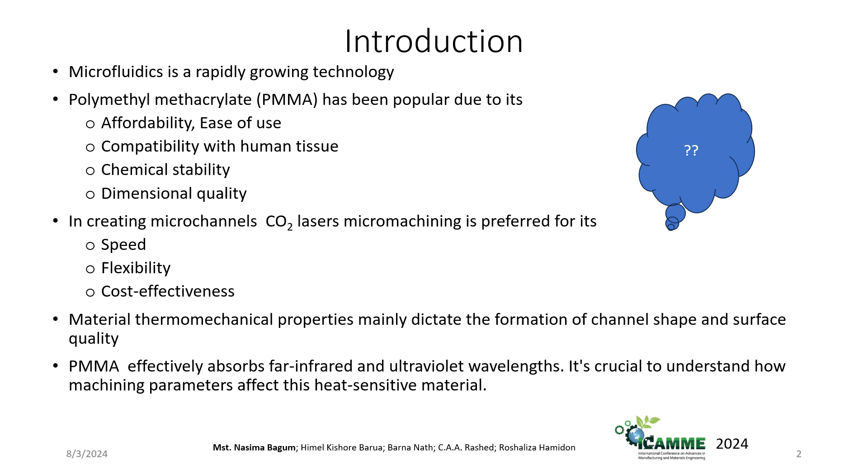In creating microchannels, previously photolithography, chemical etching, and in some cases ultra-short pulse lasers were used. However, carbon dioxide laser micromachining is preferred for its speed, flexibility, and cost effectiveness. In laser machining, material thermomechanical properties mainly dictate the formation of channel shape and surface quality. PMMA is a good absorbent of far infrared and ultraviolet wavelengths, so it is crucial to understand how machining parameters affect this heat-sensitive material.

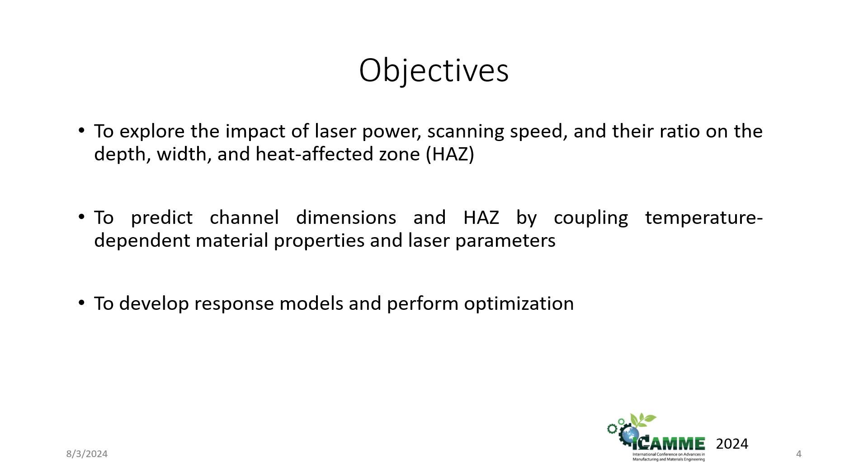Previous researchers worked on micromachining of PMMA focusing on different dimensions. The novelty of our work is we use finite element analysis and temperature-related material properties to estimate the channel width, depth, and heat affected zone. The objectives of our research are to explore the impact of laser power, scanning speed, and their ratio on the width, depth, and heat affected zone, to predict channel dimensions and heat affected zone by coupling temperature dependent material properties and laser parameters, to develop response models and perform optimization.

The methodology is shown in this slide, where a carbon dioxide CNC laser is used to create microchannels on a PMMA workpiece, with power varied from 20 to 80 watt, and scanning speed from 200 to 500 millimeter per second. According to Design Expert software, we get 11 experimental runs. Each PMMA workpiece, having dimensions of 40 by 20 by 3, was machined using a single pass. The responses, channel depth, width, and heat affected zone, were measured using an optical microscope, and the temperature generated on the work surface was estimated using COMSOL Multiphysics software.

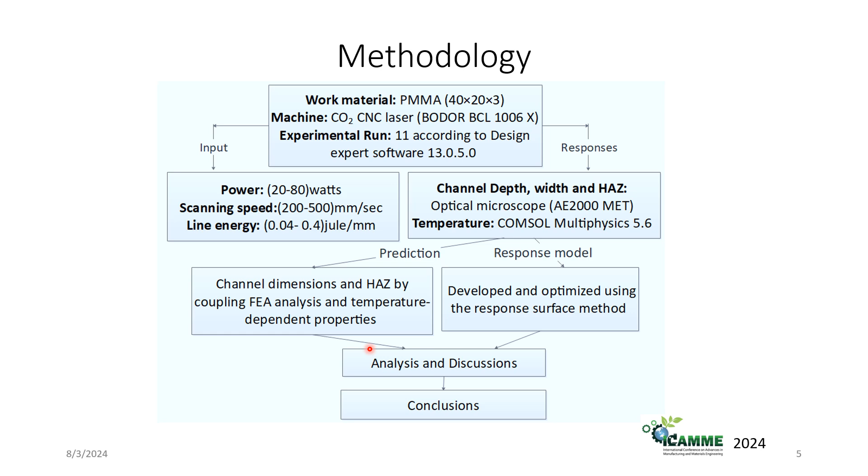Channel dimension and heat affected zone were predicted by coupling finite element analysis and temperature dependent properties. The response model was developed and optimized using the response surface method. Then the results were analyzed, discussed, and some conclusions were drawn. The laser machining schematic diagram is shown in figure 1, where laser from the source is directed to 3 mirrors and focused on the work surface.

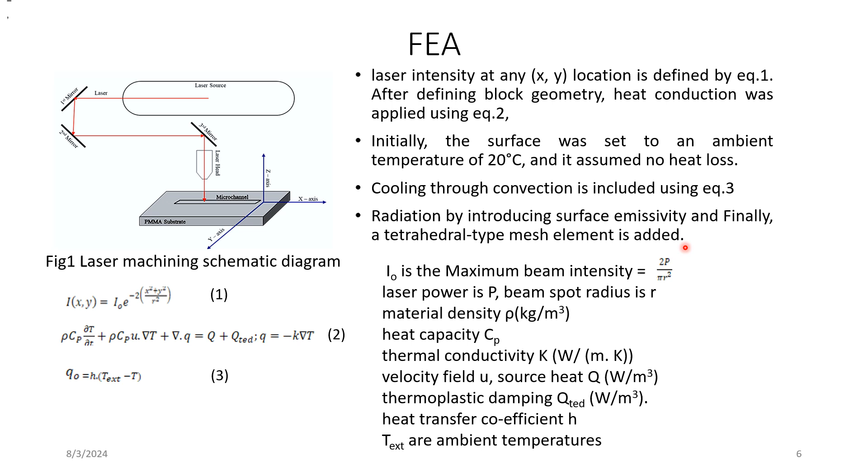In FEA, the laser intensity at any location is defined using equation 1. After defining the block geometry, heat conduction was applied using equation 2. Initially, the surface was set to an ambient temperature of 20 degrees Celsius, and it is assumed that there is no heat loss. Cooling through convection and radiation was also introduced, and finally a tetrahedral mesh element is added and the simulation was run. Here are the results.

During laser heating, temperature is adequate to vaporize PMMA. Since the laser is a moving source, this temperature gradually decreases, leading to material removal up to the sublimation point of 300 degrees Celsius. Beyond this point, the grain structure changes, resulting in the formation of the heat affected zone. In figure 2, this is the temperature profile towards the depth. When the material cools until it reaches 300 degrees Celsius, we get the channel depth, which was calculated by the cut point of the temperature profile and 300 degrees Celsius.

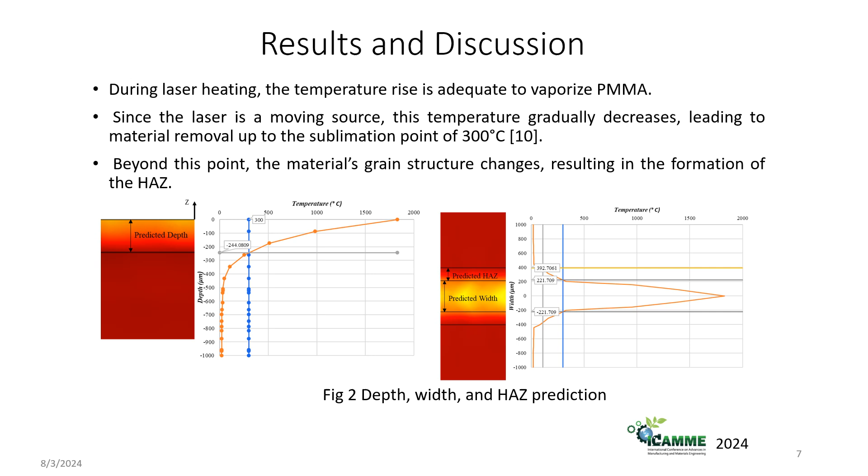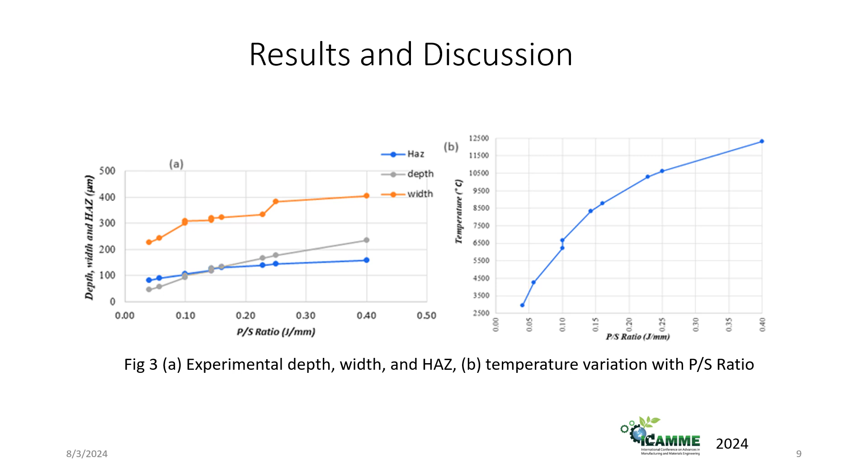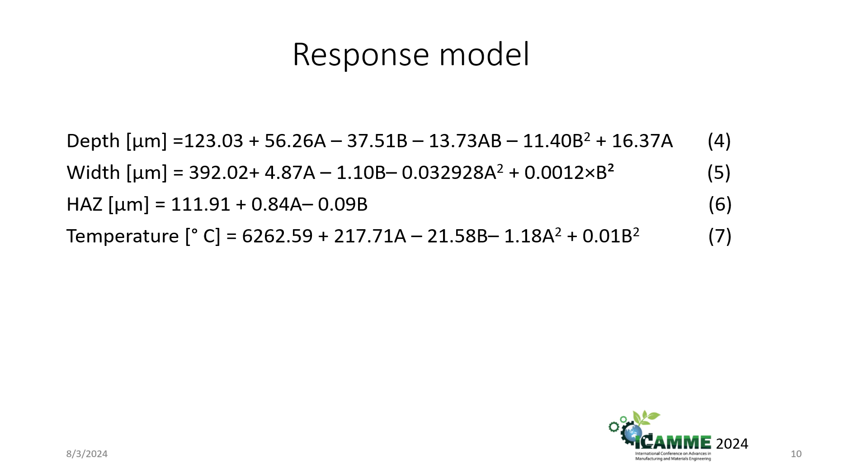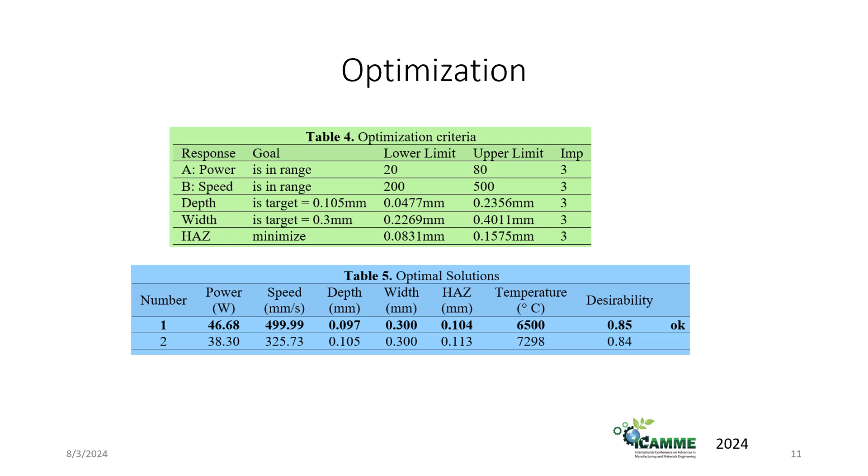Based on the highest desirability, 85%, power of approximately 47 watt and 500 millimeter per second speed give our desired channel width and depth with minimum heat affected zone of 104 micrometer. The confirmation experimental run was carried out at 47 watt and 500 millimeter per second speed. Results are shown in this figure.

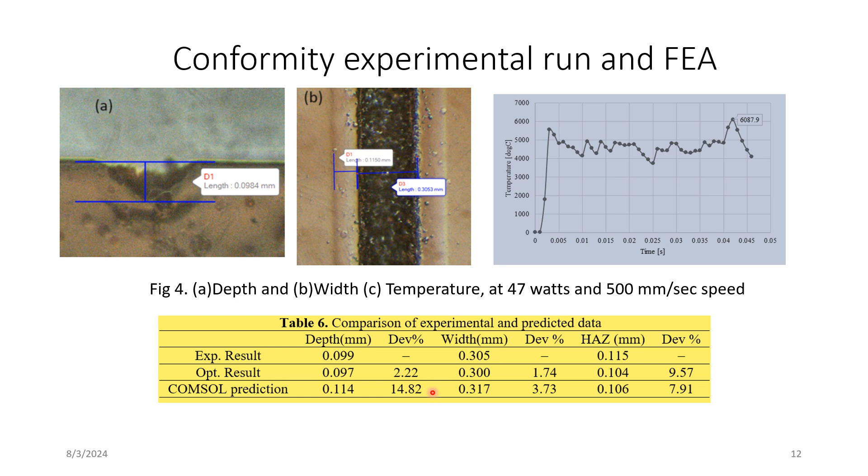So, the experimental results and FE analysis clearly show that as the power to speed ratio increases, depth of cut, width, and heat affected zone increase. The temperature is highest at the center of the beam, resulting in greater depth. Depth gradually decreases as the distance from the center increases. The heat affected zone forms as heat is conducted across the channel surfaces below the glass transition temperature.

The minimum heat affected zone, 104 micrometer, was achieved at 47 watt and 500 millimeter per second scanning speed, while getting 0.097 millimeter depth and 0.3 millimeter width. Finite element results and optimization results closely match the experimental run. Hence, the prediction can be used to analyze and make proper decisions.